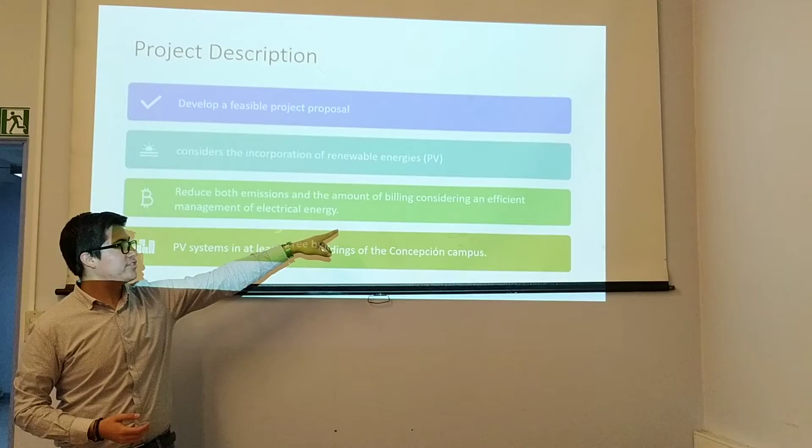The topic is energy management in UDEC Campus considering photovoltaic systems. The project is a feasibility analysis for placement of photovoltaic panels, considering incorporation of renewable energies, reducing carbon dioxide emissions, and achieving efficient management of electrical energy.

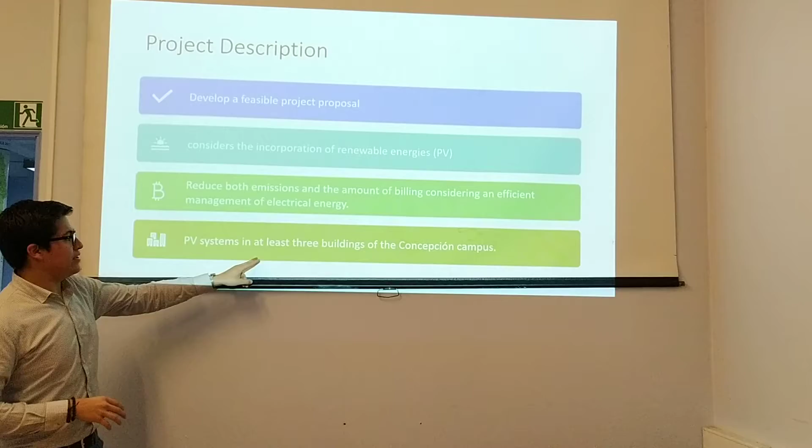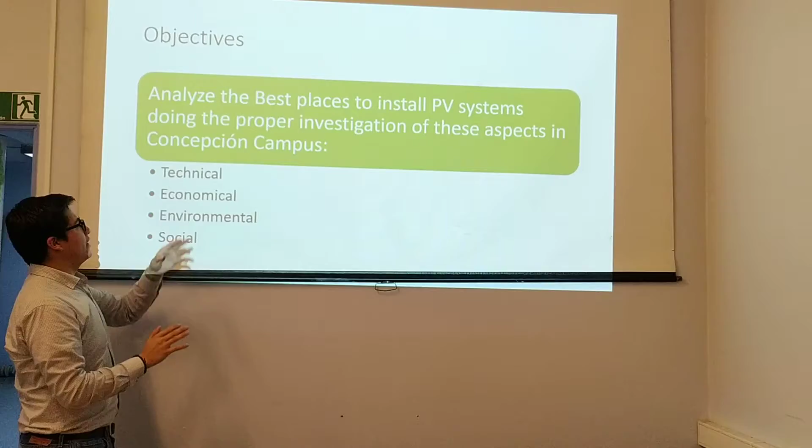The description is to propose 3 buildings at the Concepción campus where to place photovoltaic systems. The objectives are to analyze the best places to install photovoltaic systems and conduct proper investigation of technical, economical, environmental and social aspects.

The goals to reach in this project were to present a report with full analysis: a technical study of where to send the panels, economical aspects such as investments, an environmental impact study about tree planting or emissions reductions, a social study about public perception, acceptance and possible visual impact of the panels, and proper energy management to reduce peaks of energy.

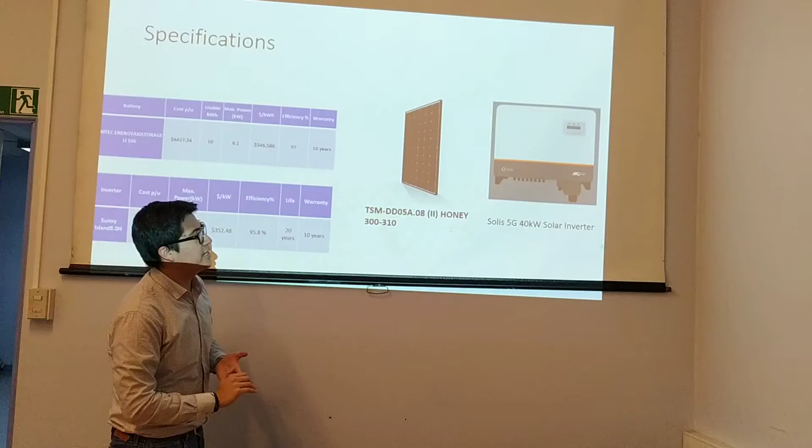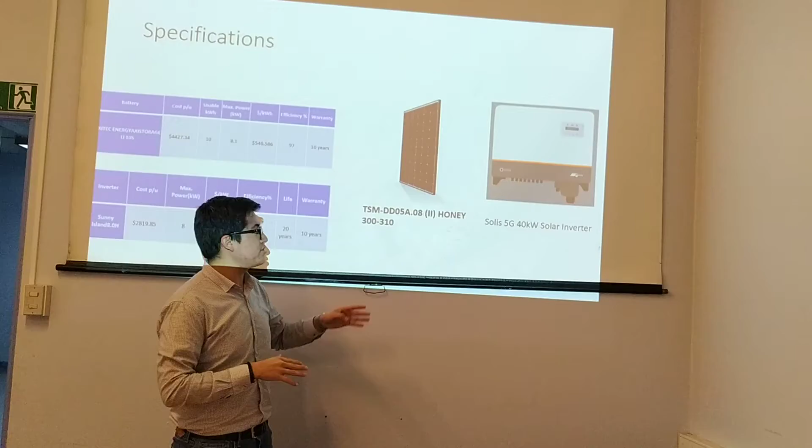For the solar components, we used Trina Solar panels and inverters, with a 40 kilowatt Solis. We used this because it has the best relation in dollars to generation per square meter, and the inverter has 5G connection so we can monitor what's happening. These two work really well together. For peak reduction, we used a battery bank from Axitec.

We used Axitec batteries because of their high warranty, and we needed inverters for these batteries since they work on DC and we need to do injection in AC. We also used inverters such as Sunny Island because of similar timing, and these values were the best.

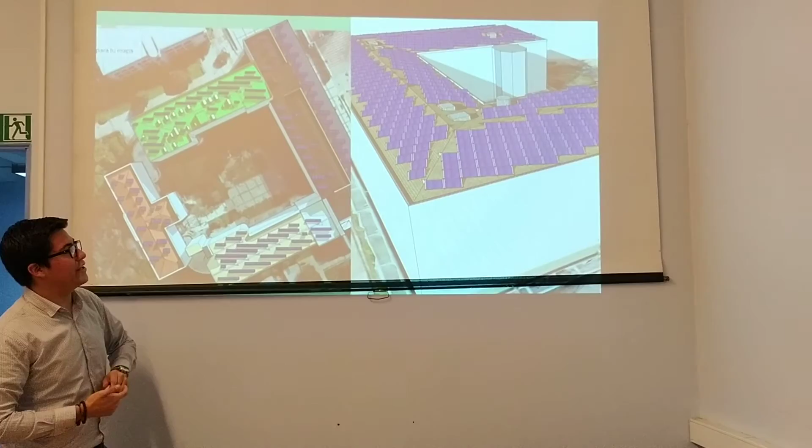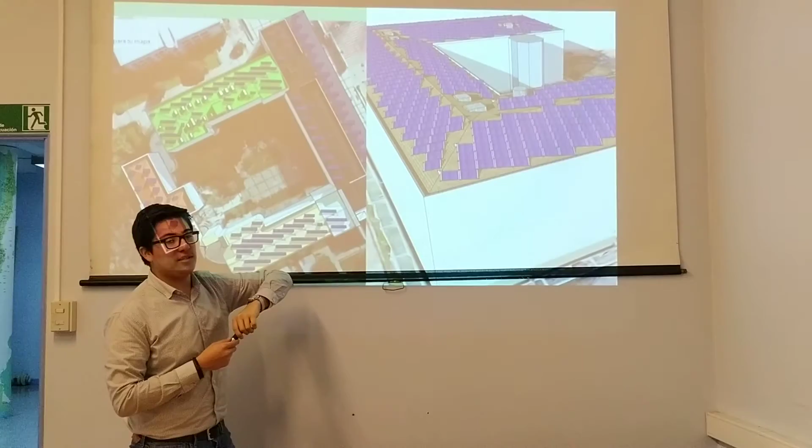Then we used different tools such as SketchUp to model 3D diagrams of the places where we expect to place solar panels. We used the roofs and considered shadows and objects, then filled it with panels using a tool called Skelion.

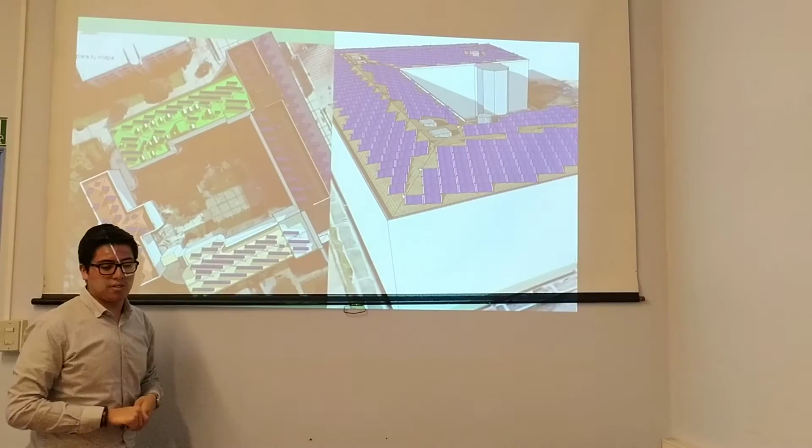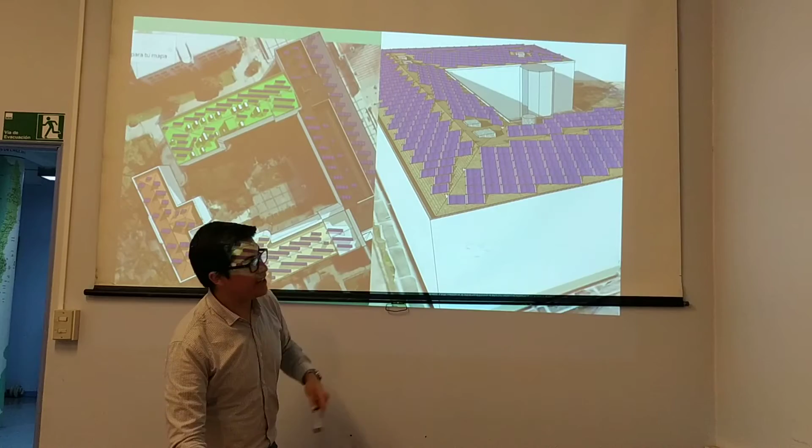The places we chose are: the chemical science building, the mechanical building, the library, and the architecture and social science buildings.

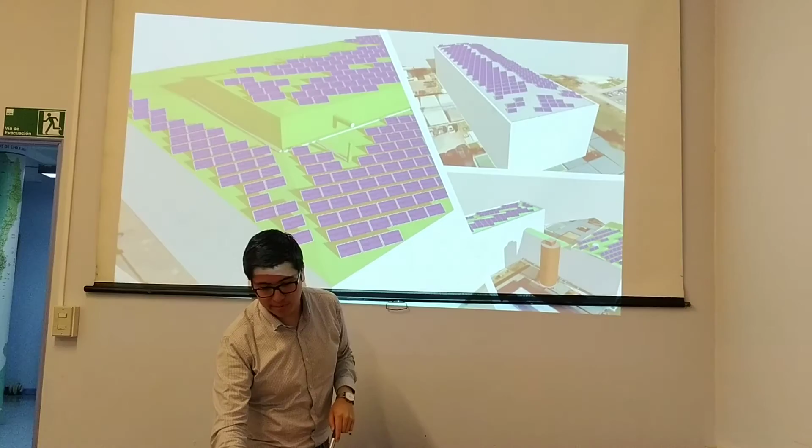For the energy storage system for energy management, the objective is to reduce this peak. Why? Because during this time the fees are 400% more expensive than during other hours, so a reduction here impacts more than a reduction elsewhere.

As we can see, consumption reduces drastically from 6 p.m. to 7 p.m. because at this hour there are no more classes at the campus and basically the administrative staff leaves. So we use the batteries and the inverter presented in the technical specifications, and with the batteries we just need to reduce this small area to achieve a 13% reduction of the peak demand.

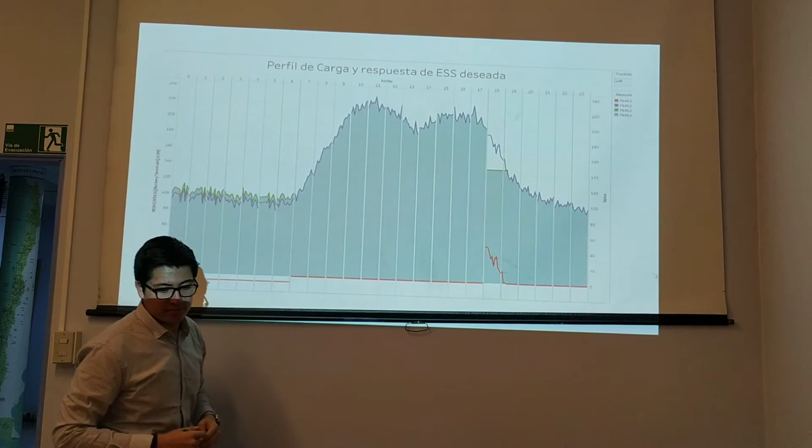Then the most important analysis we made was the social aspects. Why? Because almost 63% of respondents consider it important that the university produces its own energy.

These people's opinions mean that if UDEC generates its own electricity, possibly more students will get into the university.

We also have two curious results: people in the university think there might or might not be policies to take care of the environment. UDEC is a university from long ago, and some buildings are considered monuments, but mostly people don't care about the monuments—they care about electricity and the need to take care of the environment.